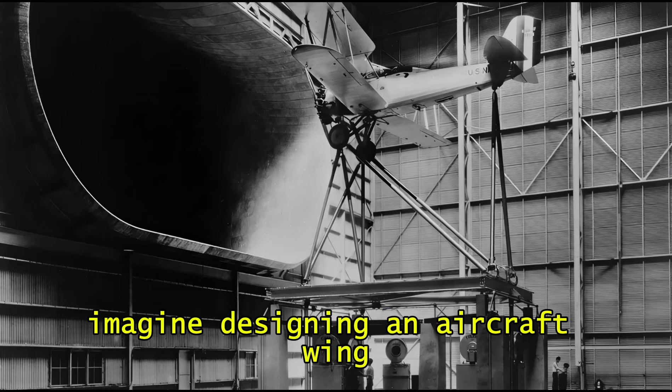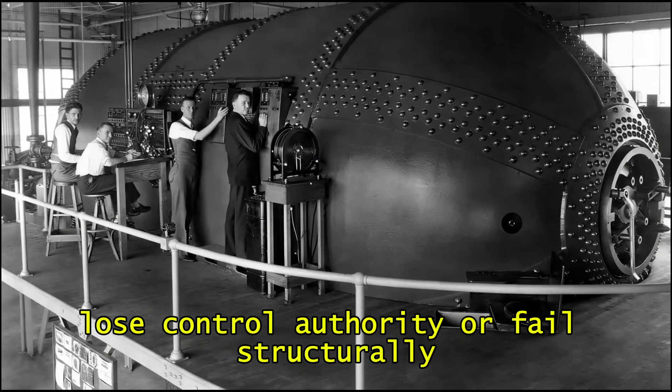Imagine designing an aircraft wing using the best equations available, validated wind tunnel data, and years of engineering experience. Yet the airplane still behaves unpredictably in flight. Some wings stall without warning, others vibrate, lose control authority, or fail structurally despite correct calculations. Engineers keep refining formulas, but the gap between theory and reality remains.

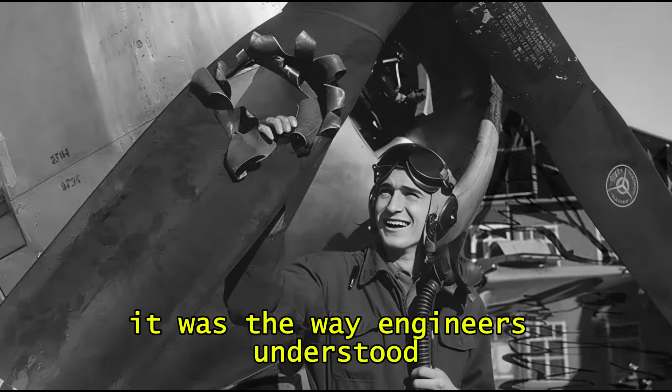One engineer realized the problem was not the wing, not the air, and not even the math. It was the way engineers understood and organized aerodynamic knowledge itself. His name was Walter Vincenti, and his work quietly reshaped how wings are designed and trusted.

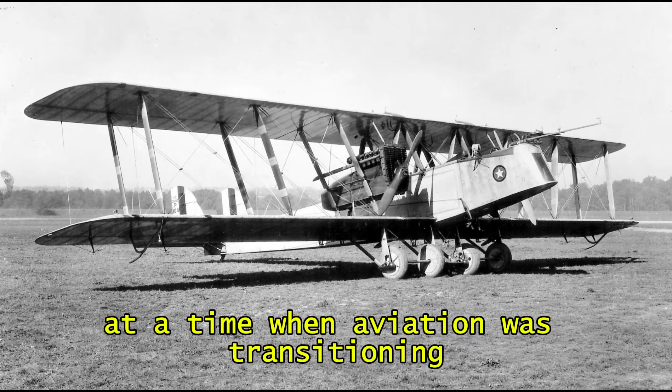Walter Vincenti was born in 1917 in the United States, at a time when aviation was transitioning from a mechanical curiosity into a structured engineering field. Powered flight already existed, but aircraft design still relied heavily on empirical methods, accumulated experience, and incremental modification. Aeronautical engineering had not yet fully separated itself from experimental practice.

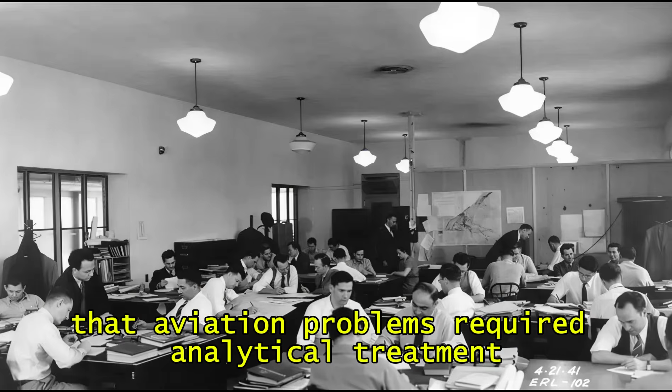This environment shaped Vincenti's intellectual development from the beginning. He pursued engineering studies with a strong emphasis on applied science rather than workshop-based design. His academic training combined mechanics, mathematics, and fluid behavior, reflecting the growing belief that aviation problems required analytical treatment rather than intuition alone. Unlike many early aviation figures who entered the field through piloting or manufacturing, Vincenti's formation was rooted in theory applied to real engineering constraints.

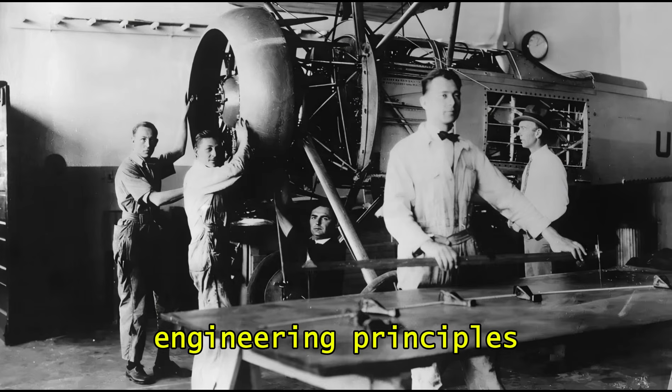After completing his education, Vincenti entered the US aeronautical research system during a period of rapid institutional growth. The National Advisory Committee for Aeronautics, NACA, had already been established as the central organization responsible for understanding the fundamental limits of flight. By the time Vincenti joined this environment, NACA's mission was clear: convert scattered experimental knowledge into usable engineering principles. Vincenti's early professional work focused on aerodynamic performance and engineering decision-making, rather than isolated component optimization.

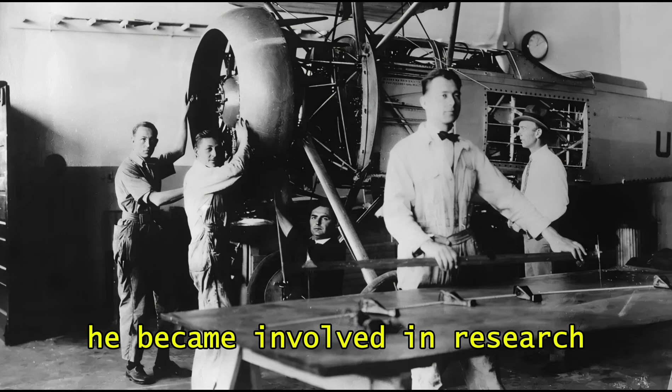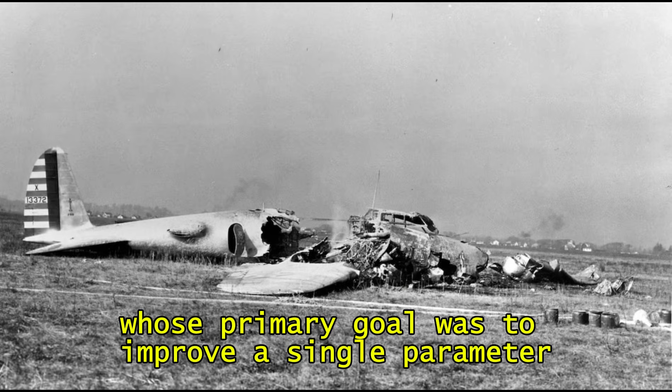He became involved in research that examined how engineers justified design choices, validated performance claims, and managed uncertainty. This focus distinguished him from researchers whose primary goal was to improve a single parameter, such as lift or drag.

One of the central problems Vincenti confronted was the lack of explicit reasoning behind many accepted design practices. Aircraft wings, control surfaces, and structural layouts often worked, but engineers could not always explain why they worked in a transferable way. Knowledge existed, but it was embedded in experience, undocumented assumptions, and local practice. This made it difficult to apply lessons learned from one aircraft program to another.

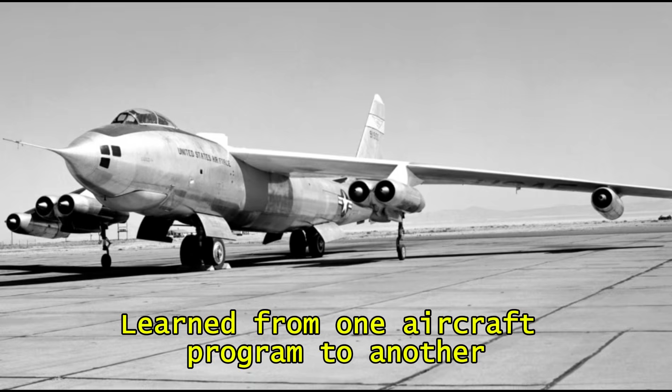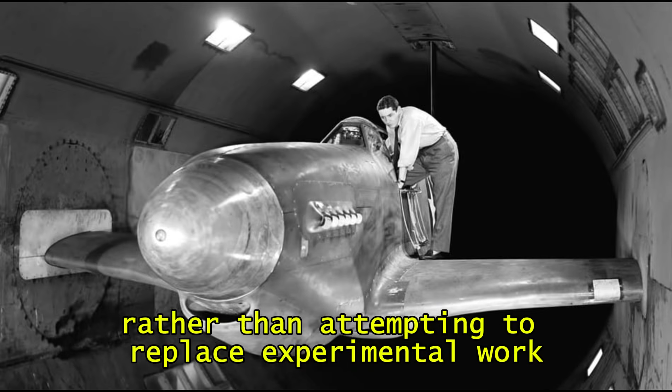Vincenti recognized that engineering progress depended not only on better equations or experiments, but on understanding how knowledge itself was generated, tested, and trusted. He observed that many aerodynamic decisions were based on precedent rather than explicit validation. This was acceptable at low speeds and limited scales, but it became problematic as aircraft grew larger, faster, and more complex.

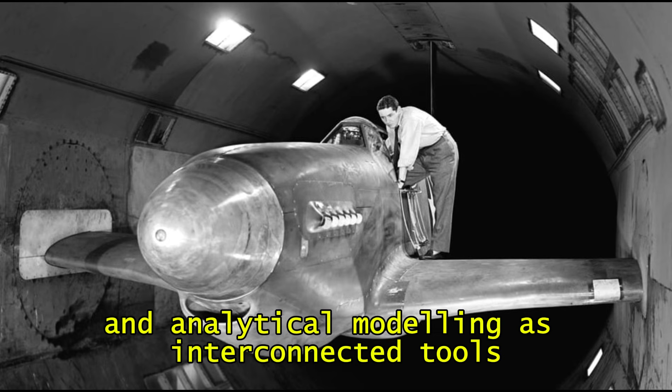Rather than attempting to replace experimental work, Vincenti examined how experiments were used to support design decisions. He studied wind tunnel testing, flight testing, and analytical modeling as interconnected tools rather than competing approaches. His interest lay in identifying which methods produced reliable knowledge and under what conditions they could be generalized.

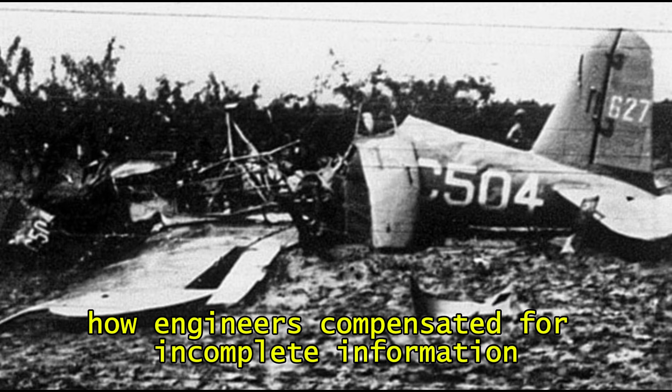This perspective led him to analyze engineering practice as a system. He examined how uncertainty entered the design process, how engineers compensated for incomplete information, and how safety margins were established. In aviation, these questions were critical because failure modes were often catastrophic and not easily reversible through incremental adjustment.

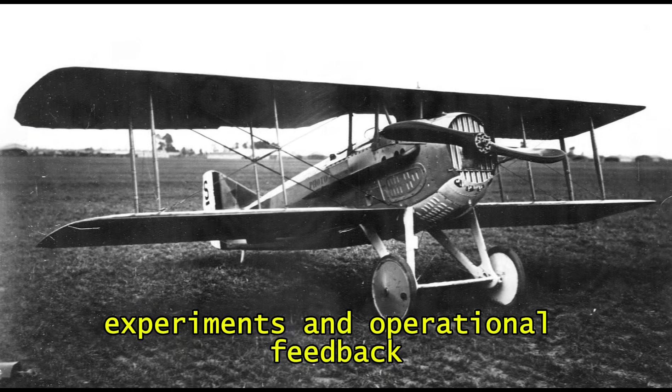Vincenti's work highlighted that aerodynamic knowledge was not purely theoretical nor purely empirical. It emerged from a structured interaction between models, experiments, and operational feedback. Engineers selected assumptions, simplified reality, and validated results through comparison with measured behavior. Vincenti documented this process carefully, emphasizing its role in producing reliable aircraft.

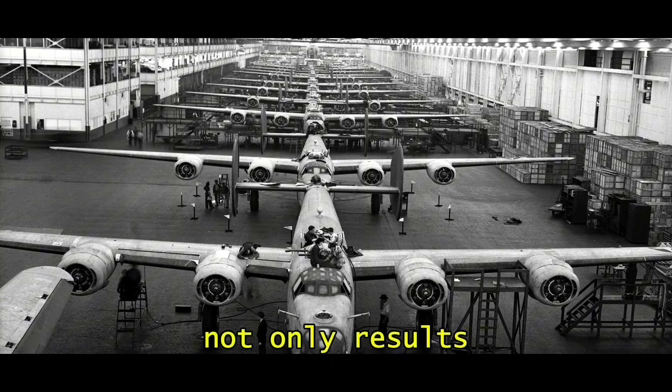During this period, Vincenti also became involved in academic teaching and research dissemination. He contributed to the training of engineers who would later work across government laboratories, industry, and universities. His approach encouraged engineers to question not only results, but the reasoning behind those results.

Unlike researchers who focused on discovering new aerodynamic phenomena, Vincenti focused on how existing phenomena were transformed into engineering knowledge. He examined why certain aerodynamic principles became standard practice while others were abandoned. This required studying historical design choices, institutional constraints, and the evolution of testing methods.

By the mid-20th century, Vincenti had established himself as a leading figure in the analysis of engineering knowledge production. His work did not aim to create new aircraft configurations or breakthrough technologies.

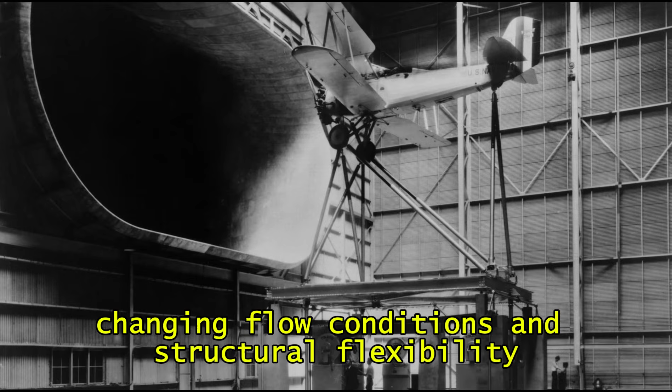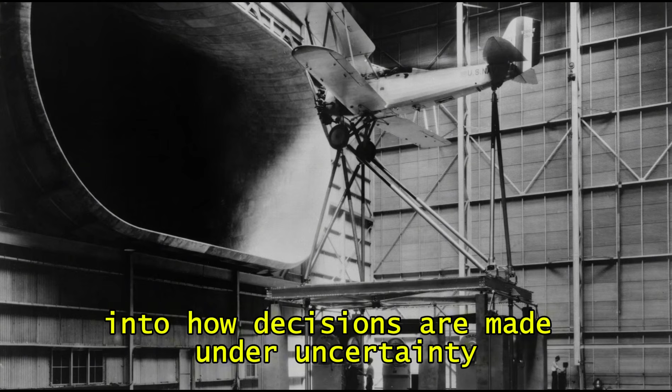Instead, it clarified how engineers decide what is safe, efficient, and reliable when complete information is unavailable. This contribution was particularly important for wing design. Wings operate under variable loads, changing flow conditions, and structural flexibility. Understanding how engineers evaluate these factors required more than aerodynamic equations; it required insight into how decisions are made under uncertainty.

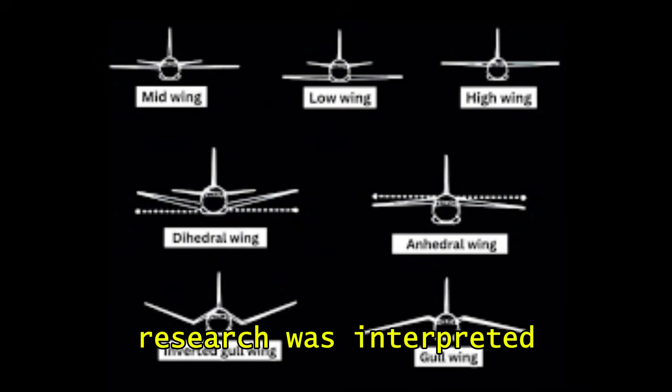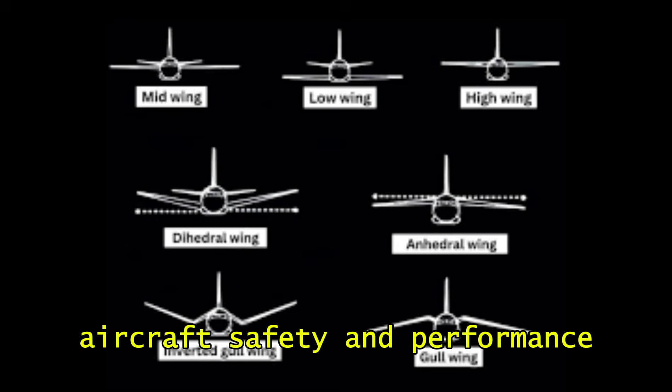Vincenti's work provided that insight. He showed that aviation advances not only through better tools, but through better reasoning about how those tools are used. By making the logic of engineering explicit, he helped transform aeronautical design into a disciplined, transferable practice rather than a collection of isolated successes. This foundation would later influence how aerodynamic research was interpreted, taught, and applied across the aerospace industry. But its importance lies in its clarity. Aircraft safety and performance depend as much on how engineers think as on the equations they solve.

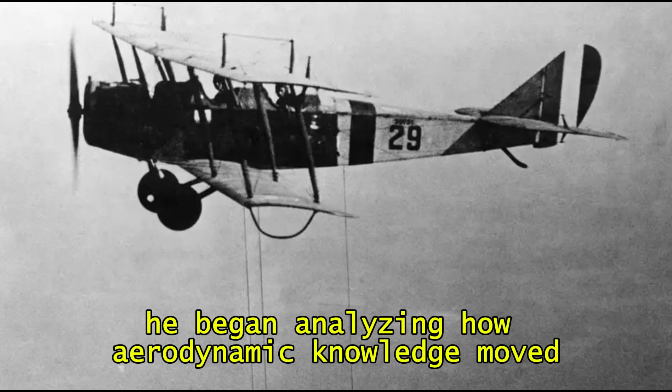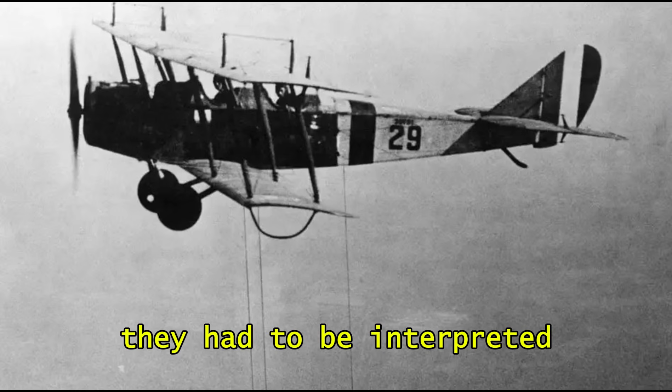As Vincenti's career progressed, his work shifted from observing engineering practice to formally structuring it. He began analysing how aerodynamic knowledge moved from laboratory research into operational aircraft. This transition was not automatic. Data produced in wind tunnels or equations derived analytically did not become useful simply because they existed. They had to be interpreted, bounded, and judged credible before designers trusted them. Vincenti focused on this gap between scientific result and engineering use.

In wing design, this gap was critical. Aerodynamic behaviour varied with scale, Reynolds number, surface finish, and structural flexibility. Engineers routinely faced situations where test data conflicted or where analytical predictions failed outside narrow conditions. Vincenti examined how engineers decided which results to trust and which to discard.

One of his key contributions was identifying different categories of engineering knowledge. He distinguished between fundamental theory, empirical correlations, design rules, and operational experience. In aerodynamics, these categories were often mixed without clear separation. Vincenti showed that confusion between them led to design errors, especially when wings were pushed into new flight regimes.

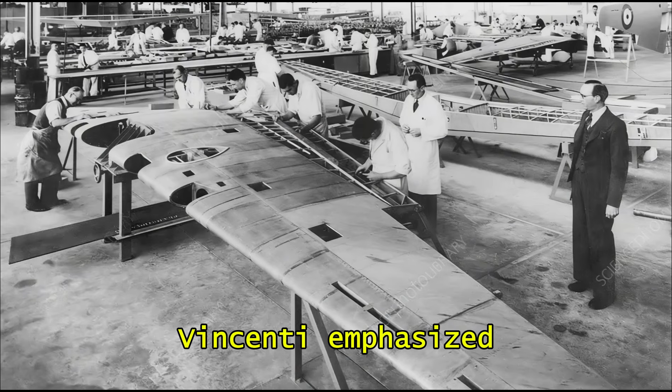This framework had direct implications for wing development. For example, a wind tunnel result might accurately describe lift behaviour at a given scale, but become misleading when applied to a full-size wing operating in turbulence or manoeuvring flight. Vincenti emphasised that engineers needed explicit criteria to determine when such extrapolation was valid.

He also analysed how uncertainty was managed in wing design. Engineers rarely had complete information about airflow behaviour across an entire operating envelope. Instead of eliminating uncertainty, they contained it through margins, redundancy, and conservative assumptions. Vincenti documented how these margins were chosen and how they evolved as confidence in aerodynamic models increased.

In practical terms, this work influenced how wings were certified and approved. Rather than relying solely on peak performance numbers, engineers evaluated robustness, how sensitive a wing was to manufacturing variation, surface damage, or unexpected flow conditions. Vincenti showed that a design that performed slightly worse on paper could be safer and more reliable in service.

His research also clarified the role of failure in advancing aeronautical knowledge. Wing-related accidents were not treated merely as mechanical breakdowns. Vincenti analysed them as information sources that revealed limits of existing models. When a wing behaved unexpectedly, the question was not only what failed, but which assumptions had been wrong.

This approach changed how post-war aeronautical research was conducted. Instead of seeking universal aerodynamic laws applicable everywhere, researchers increasingly focused on defining domains of validity. Wing theories were no longer judged by elegance alone, but by how clearly their limits were specified.

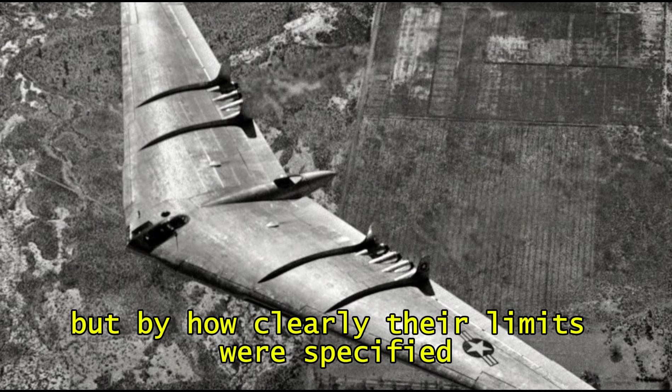Vincenti's influence extended into how design teams were organised. He emphasised communication between aerodynamicists, structural engineers, and test pilots. Wing behaviour could not be understood in isolation. Structural flexibility altered airflow, and pilot input altered load paths. Vincenti's work reinforced the idea that wing design was inherently interdisciplinary.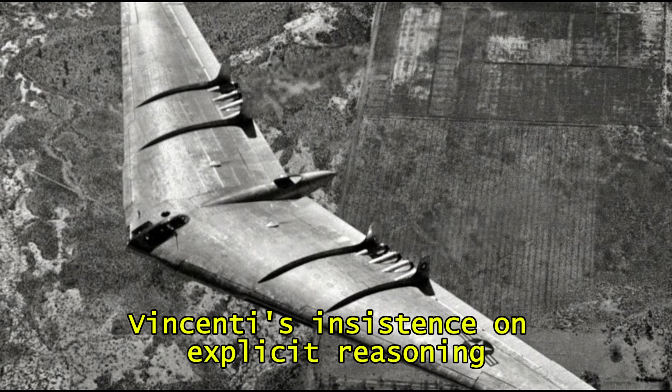As aircraft entered higher speed regimes, this perspective became essential. Swept wings, thinner profiles, and higher load factors amplified sensitivity to modelling assumptions. Vincenti's insistence on explicit reasoning helped engineers identify which aerodynamic predictions remained trustworthy and which required new validation.

Beyond government research, his ideas spread through academia and industry. Engineering curricula began incorporating case-based reasoning rather than purely equation-driven instruction. Students learned not only how to compute aerodynamic forces, but how to judge whether those computations applied to real aircraft wings.

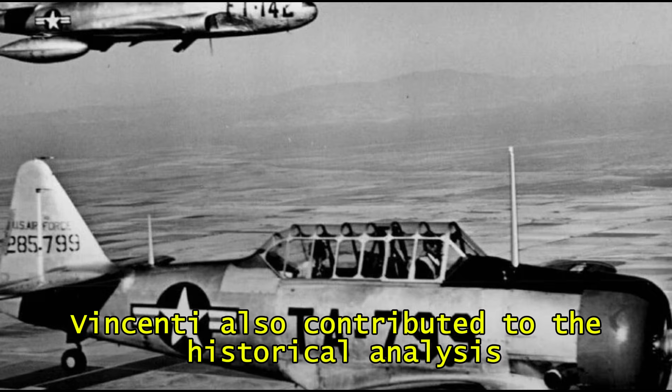Vincenti also contributed to the historical analysis of aeronautical innovation. He demonstrated that major advances in wing design rarely came from single breakthroughs. Instead, they emerged from gradual refinement of methods, better experimental discipline, and clearer reasoning about uncertainty.

This challenged the myth that progress depended solely on genius or revolutionary ideas. By formalizing how aerodynamic knowledge was evaluated and transferred, Vincenti strengthened the reliability of wing engineering as a profession. His work ensured that improvements in performance did not outpace understanding, reducing the risk of catastrophic surprises in flight. This contribution was subtle but decisive.

Aircraft wings did not become safer because engineers knew more equations. They became safer because engineers learned how to decide which knowledge could be trusted under specific conditions. That change shaped modern aeronautical engineering practice, and it remains embedded in how wings are designed, tested, and certified today.

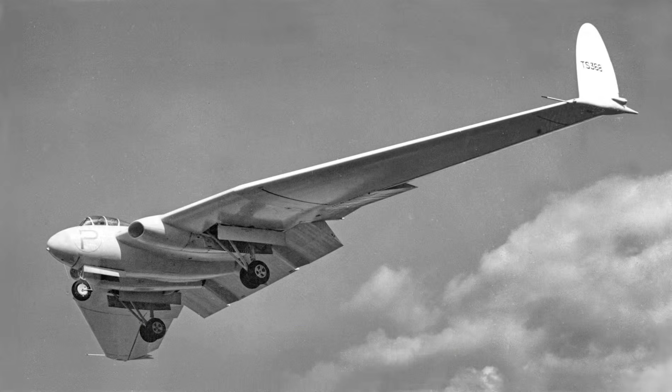Walter Vincenti's most lasting impact on aviation did not come from a single wing, airfoil, or aircraft. It came from how he showed engineers to use knowledge itself when designing wings under uncertainty.

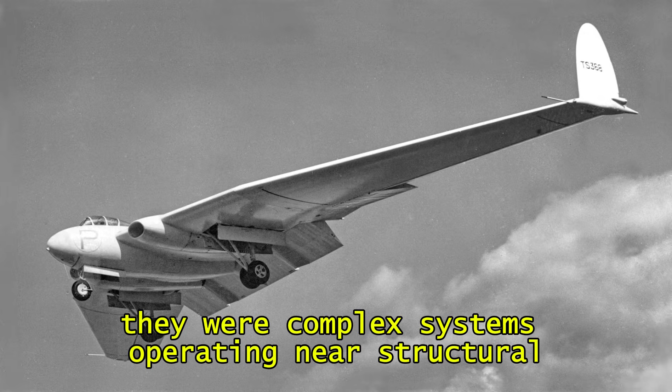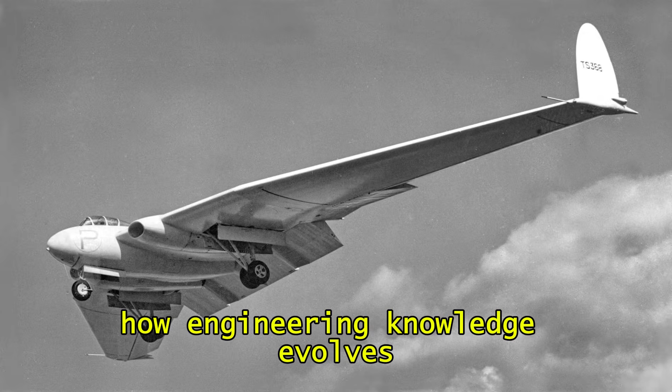By the mid-20th century, aircraft wings were no longer simple lifting surfaces. They were complex systems operating near structural, aerodynamic, and safety limits. Vincenti recognized that the central challenge was no longer discovering equations, but deciding which knowledge could be trusted, when and why. One of Vincenti's key contributions was clarifying how engineering knowledge evolves through use, not theory alone.

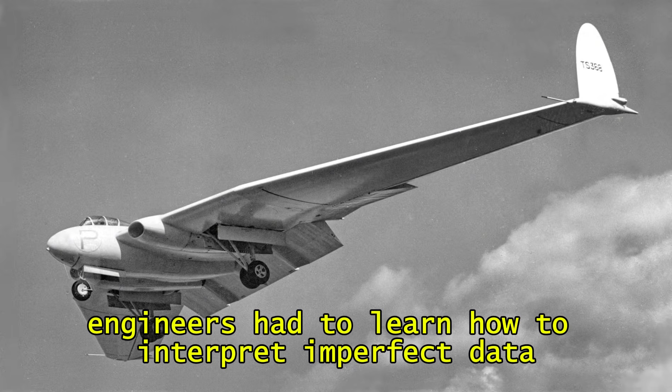In wing design, this was critical. Aerodynamic data from wind tunnels, flight tests, and operational experience often disagreed. Instead of treating these conflicts as failures, Vincenti showed that they were normal stages in engineering development. Engineers had to learn how to interpret imperfect data and refine it through application.

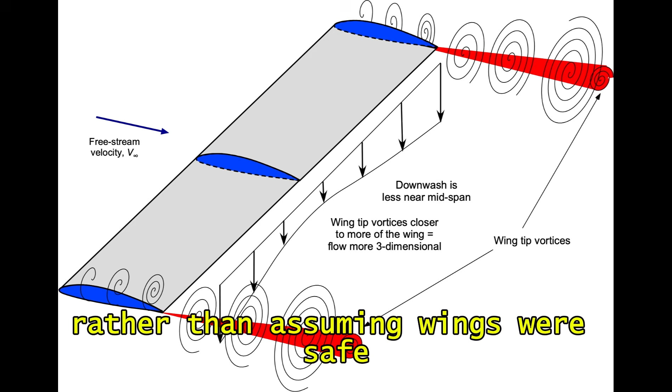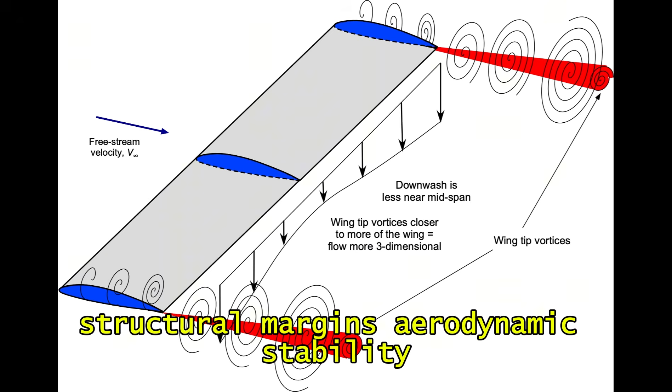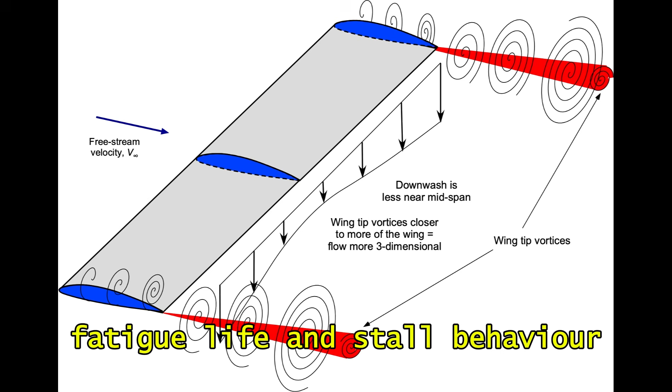This insight directly influenced how wings were designed for safety and certification. Rather than assuming wings were safe because they met theoretical criteria, Vincenti emphasized validation through multiple independent methods. Structural margins, aerodynamic stability, and failure modes had to be understood as interacting factors. This thinking shaped how engineers evaluated wing loads, fatigue life, and stall behavior, especially for transport aircraft where failure was unacceptable.

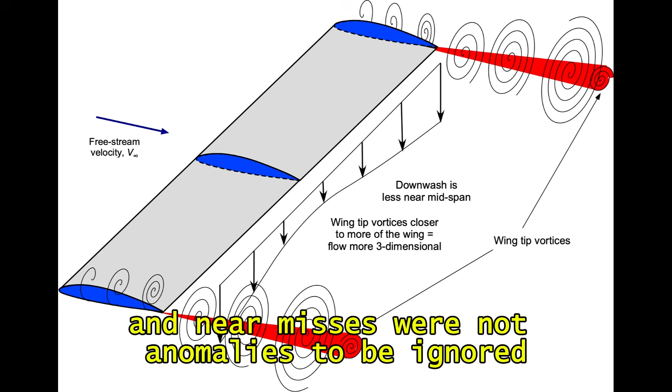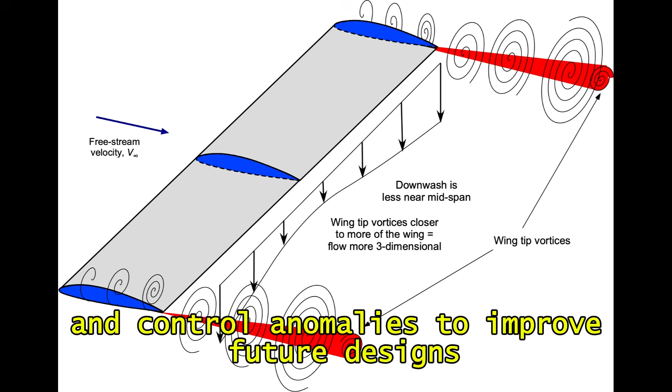Vincenti also highlighted the role of negative knowledge in wing engineering. Accidents, unexpected stalls, structural failures, and near misses were not anomalies to be ignored. They were critical sources of information. Each failure revealed gaps in existing models. In wing design, this meant learning from flutter incidents, load exceedances, and control anomalies to improve future designs. Modern wing safety standards owe much to this philosophy.

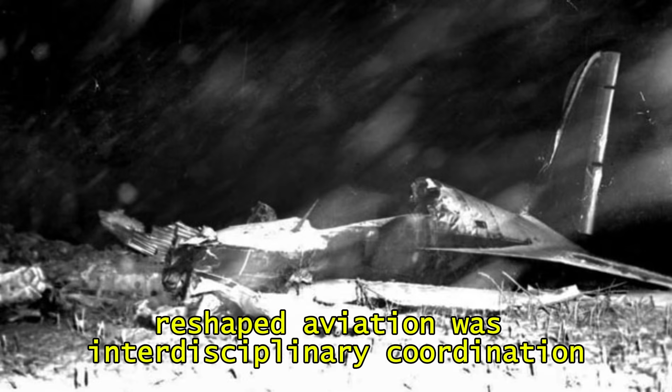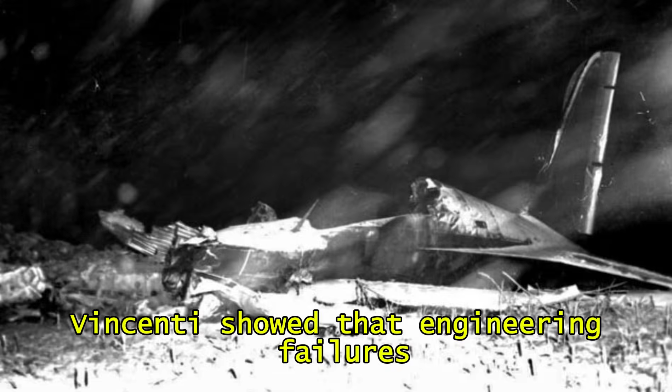Another area where Vincenti's thinking reshaped aviation was interdisciplinary coordination. Wing design is not purely aerodynamic. It involves structures, materials, control systems, and manufacturing. Vincenti showed that engineering failures often occurred not because one discipline was wrong, but because interactions between disciplines were poorly understood. His work encouraged integrated design teams, where wing geometry, stiffness, and aerodynamic behaviour were considered together.

This approach became essential as aircraft entered higher speed regimes. Swept wings, thin profiles, and higher aspect ratios increased sensitivity to uncertainty. Small modelling errors could produce large real-world consequences. Vincenti's framework helped engineers recognise where conservative design margins were necessary and where innovation could proceed safely. This balance allowed progress without repeating catastrophic mistakes.

His influence extended strongly into aviation education. Vincenti argued that engineers should not be trained only to apply formulas, but to understand the origin, limits, and reliability of the knowledge they used. In wing engineering, this meant knowing when aerodynamic theory applied cleanly, when empirical data dominated, and when assumptions broke down. This mindset shaped how generations of aerospace engineers approached design decisions.

Importantly, Vincenti did not oppose innovation. He explained how innovation becomes possible after uncertainty is reduced to manageable levels. In wing design, this allowed new configurations, higher efficiency, and lighter structures, because engineers knew which risks were real and which were artifacts of incomplete knowledge. Progress became deliberate rather than accidental.

By the late 20th century, many of Vincenti's ideas were so embedded in engineering practice that they were no longer attributed to him. Certification procedures, safety margins, design reviews, and validation protocols all reflected his thinking. Wings were no longer judged only by performance numbers, but by how well their behaviour was understood across all operating conditions. Walter Vincenti did not make wings faster by adding power or inventing new shapes.